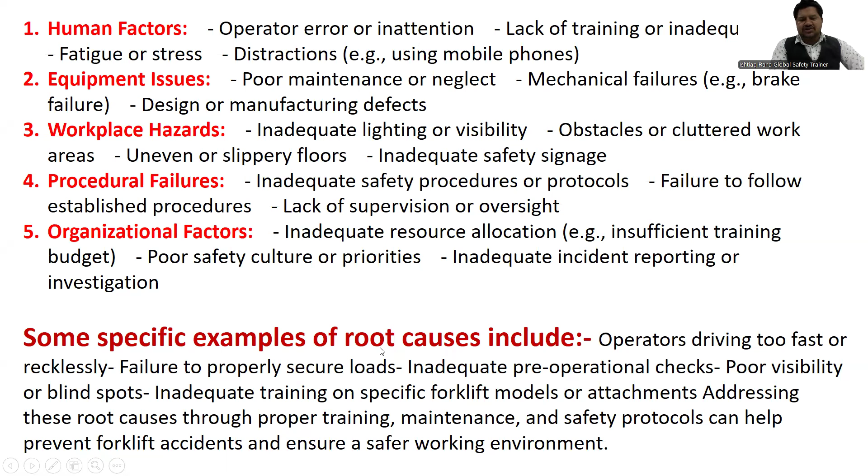You will find plenty, but one is human factors. The second is equipment issues, workplace hazards, procedural failures, or organizational factors like inadequate resource allocation or insufficient training budget. Root causes also include examples like operators driving too fast or recklessly, failure to properly secure loads, and so many other reasons, sometimes no pre-operational checks.

If I ask one more question, what are the common root causes of incidents? I'm sure you will find plenty, but these are the top 20. Shortcut always comes first - 95% of my students and trainees always mention shortcuts.

Out of my 3,000 plus training sessions in more than 12 different countries, this is the claim I'm sharing, because I always ask experienced trainees, as per their understanding, what are the real root causes of accidents. And that's what they mention.

A lot of people mention shortcuts, carelessness, ignorance, no attentiveness, poor knowledge, overconfidence, unsafe acts, unsafe conditions, defective tools and equipment, no use of PPE or no effective trainings, excessive workload, poor communication, not following safety rules and regulations, or poor leadership - like use of push policy only, no value to the safety system, no value to work permits, no joint inspections, poor preparation.

And no self-realization, like 'my safety, my department, my life' - first of all, my responsibility. So safety starts from me, safety starts from you.

Now, another question to all of you: how can we prevent fire incidents 100%, or forklift incidents? Can we? Yes. But in fact, it's a big no, but we can try.

100%. Do you have any understanding about PDCA? Because if you understand PDCA, then I can claim your life is very organized, because you are following PDCA and continually improving. What is PDCA? P stands for plan, D stands for do, C stands for check, A stands for act. So PDCA means plan, do, check, act - and don't do anything without a plan.

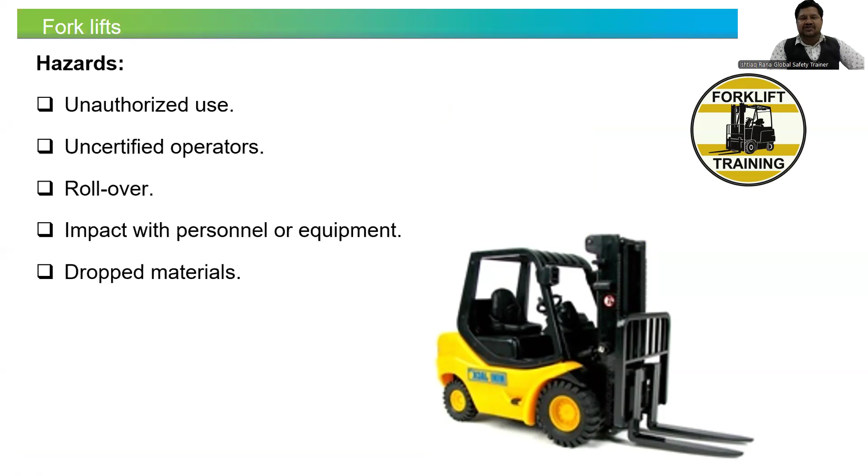Specifically, if we talk about forklift hazards, I can give you an example of Saudi Aramco. They have identified hazards like unauthorized use, uncertified operators, rollover, impact with personnel or equipment, dropped materials - and what control should be there.

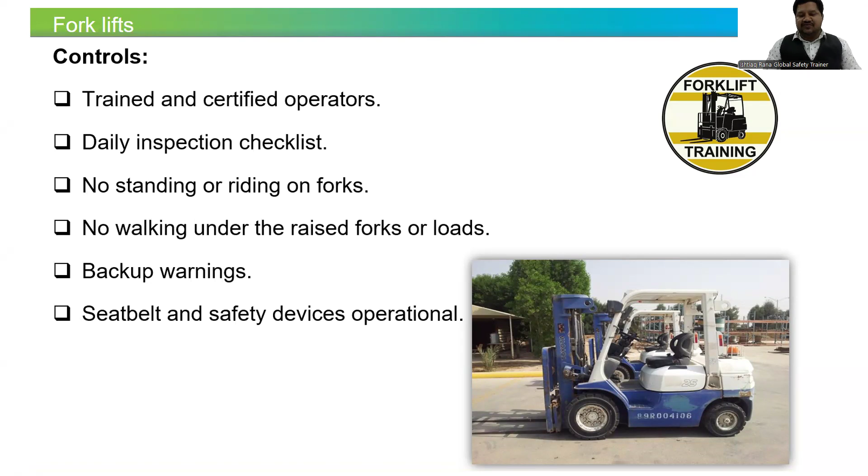Make sure we have trained and certified operators. Daily inspection should be there. No standing or riding on forks, or walking under raised forks or loads. Backup warning should be working. Seat belt should be functioning, and safety devices must also be operational.

Bear in mind, the voice of a forklift safety manager is: it's time to view safety not as a cost, but as an investment in our most valuable assets, which are people.

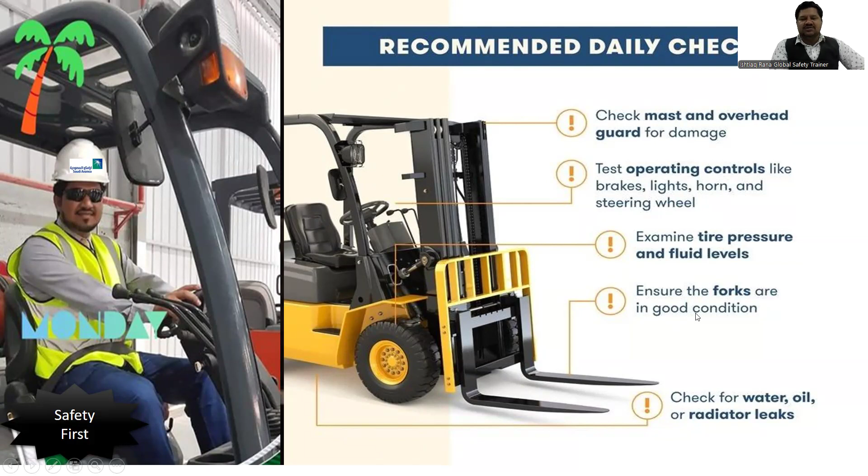So what daily checks are most recommended? Make sure you check the mast and overhead guard for damage. Test operating controls like brakes, lights, horn, and steering wheel. Examine tire pressures and fluid levels. Ensure the forks are in good condition. Check the water, oil, or radiator leaks.

We should put up safety signs and safety posters for general awareness of our people. One example I gave: carry it low and keep it slow. So we can put some safety posters, and simple safety rules like focus safety, highlighting some of the safety rules.

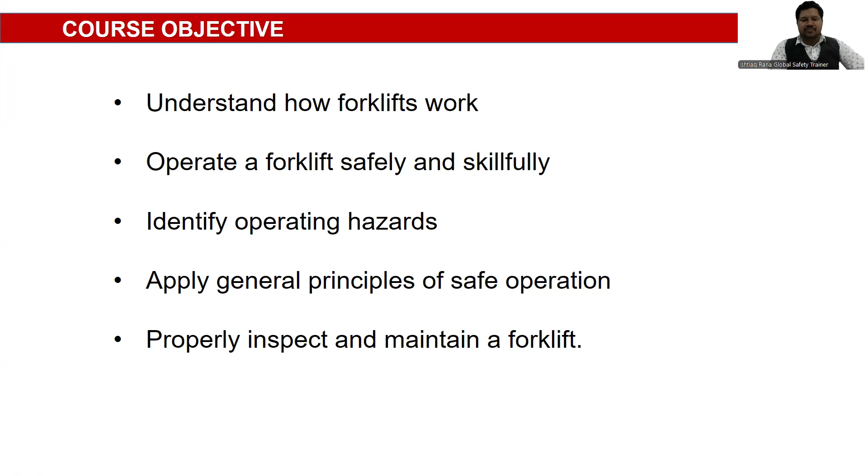Our clear course objective: understand how forklifts work, how the operator must operate the forklift safely and skillfully, the operating hazards, and most importantly the principles of safe operation, and how to properly inspect and maintain a forklift. We will cover 9 different domains: introduction, parts of forklift, forklift accidents, types of forklifts, forklift stability, data plate, and most importantly, forklift safety pre-operational inspection and review.

So let's start with the introduction. Make sure you are 18 years or older to operate a forklift. Below 18 years, the forklift shouldn't be allowed to operate.

Why is forklift training necessary? This is a question for you. Please highlight your answer in the comments, and I'm sure you'll reply if you're watching this video as a passionate learner. Reply with the answer: why is forklift training necessary? Why? I'm waiting for your answer.

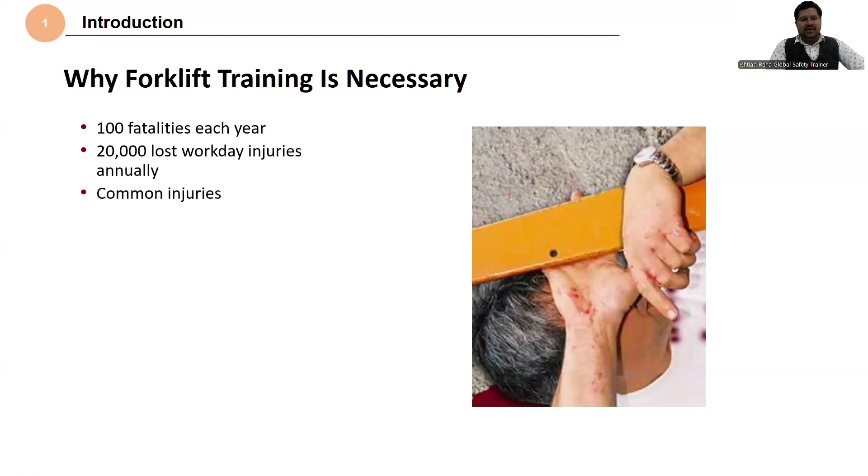Otherwise, I'll tell you: 100 fatalities each year, 20,000 lost work day injuries annually. Common injuries include hitting a pedestrian, tipping over due to improperly positioned loads, falling from raised forks, even falling from a ladder while struck by a forklift, and falling material. As per OSHA 1910.178, only trained and authorized operators shall be permitted to operate powered industrial trucks.

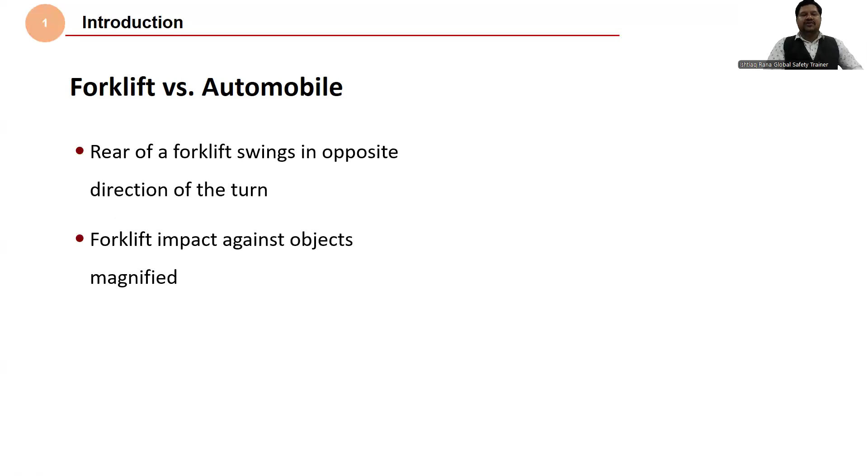So forklift versus automobile, look at the difference. The rear of a forklift swings in the opposite direction of the turn, and a forklift's impact against an object is magnified. Bear in mind, the rear of a forklift swings in the opposite direction of the turn, and the forklift's impact against an object is magnified as it drives backward and forward.

The rear of a forklift swings in the opposite direction of the turn, and the forklift's impact against an object is magnified as it drives backward or forward. One hand on controls, one hand on controls. So look at the difference between how a car and a forklift operate.

So if I ask you, what is easier to operate, a forklift or a car? I'm waiting for your answer.

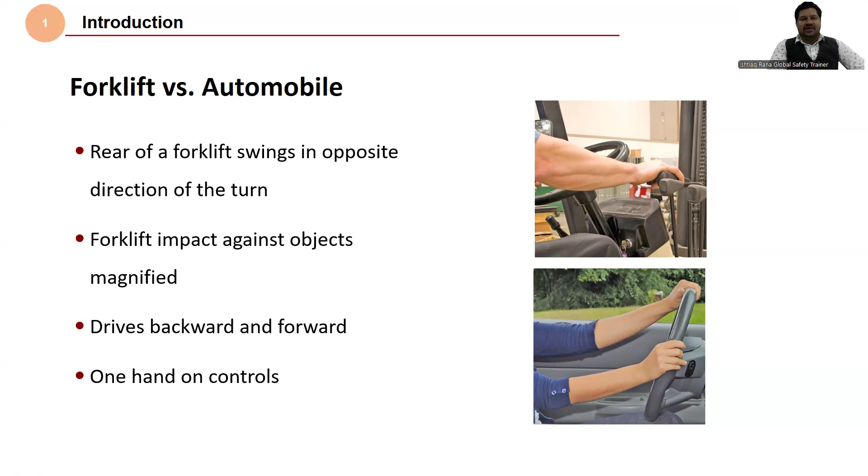Yes, there must be PPE, especially gloves, glasses, hearing protection devices, helmet, and insulated jacket in case of cold stores. And now, parts of the forklift.

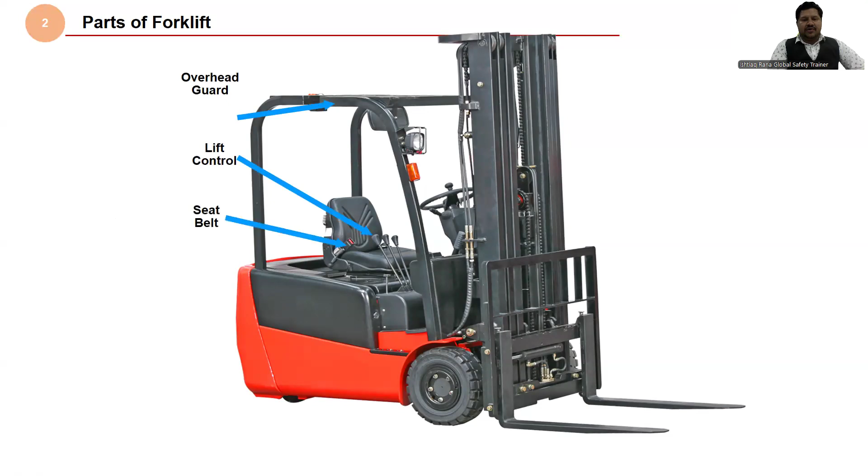Look at the forklift, these are the parts: overhead guard, lift control, seat belt, tilt control, mast, and lift cylinder, which is very important.

Lift chains should be kept in good condition and maintained at all times. A preventive maintenance plan for the forklift is very important to manage all these parts: backrest, carriage, and forks. Forks should not be wobbling; everything should be in good condition.

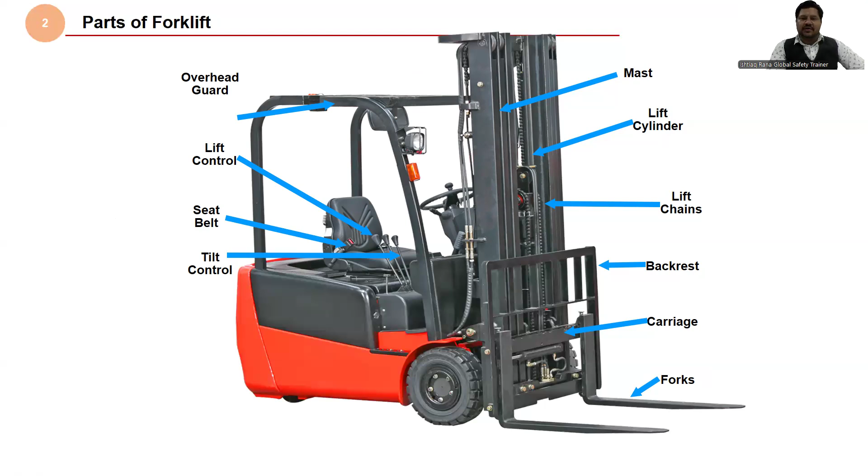Otherwise, report to the maintenance department, raise a work order, and let them correct it. Don't operate a damaged or defaulted forklift, because after all, your life is important and you are the only hero for your family. So don't put yourself at risk - be safe. Safety is your necessity, because a company will simply get new employees.

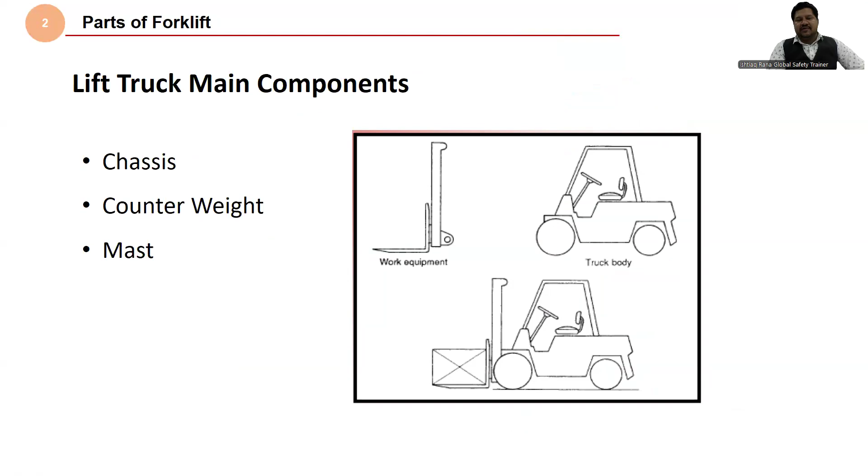Lift truck main components include chassis, counterweight, mast, work equipment, and truck body. The counterbalance balances everything to achieve center of gravity.

Of course, counterbalance forklifts are 99.9% front wheel drive and rear wheel steering. Why? Because in a loaded condition, all of the weight shifts over to the drive axle for maximum traction and braking power. In a turning situation, the rear end of the truck swings while the front end stays stationary.

Look at the engine-powered forklift: mast, overhead guard, hydraulic pump, engine, rear wheel, clutch or torque converter, transmission, fork, mast, and even front wheel and front axle.

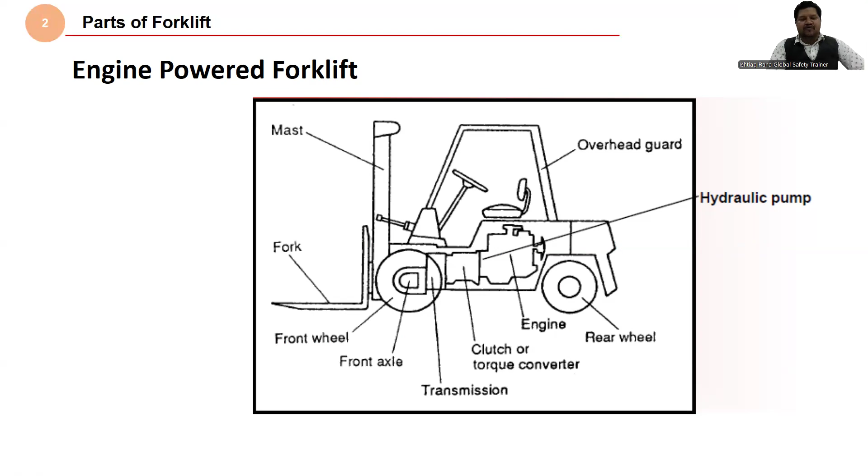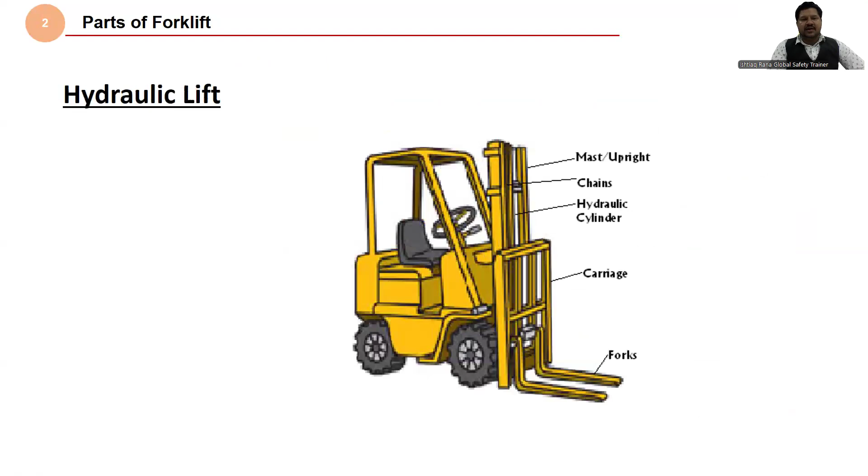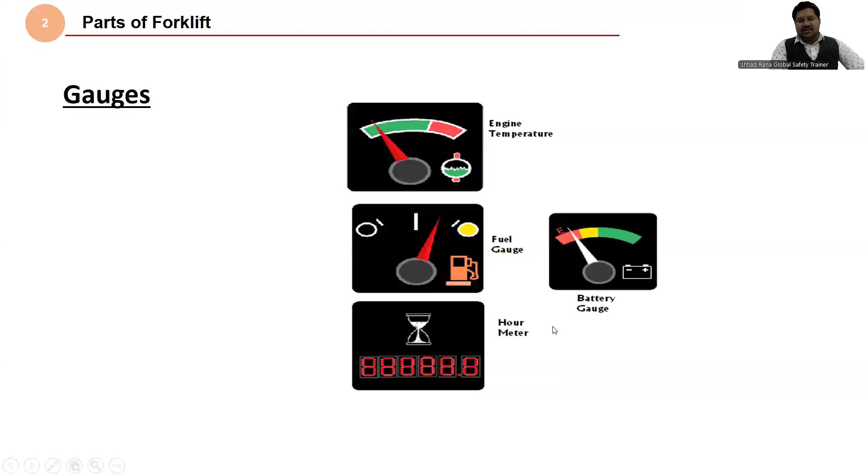Hydraulic lift, mast, upright chains, hydraulic cylinder, carriage and forks. And gauges are important, like engine temperature, fuel gauge, battery gauge, and hour meter.

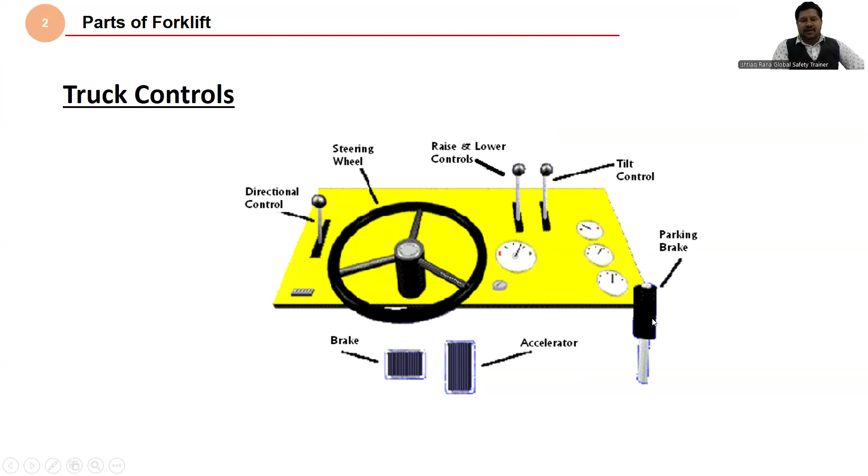Truck controls - make sure we understand directional control. This one shows we have raise and lower controls, tilt control, parking brake, accelerator, and brake. Switches include horn and ignition.

Mast specifications: overall lowered height, or maximum fork height, or free lift, OALH or MFH - usually the same, but they vary based upon the mast overlap.

Keep learning, guys, keep learning, because being a defensive forklift operator requires a lot of training. The training zone is helping with that encouragement to keep learning every day. It's not like you'll watch this video one time and understand everything. You might have to watch it again and again just to make sure you understand every technical point, every word, and don't move on to the next page until you understand the current one.

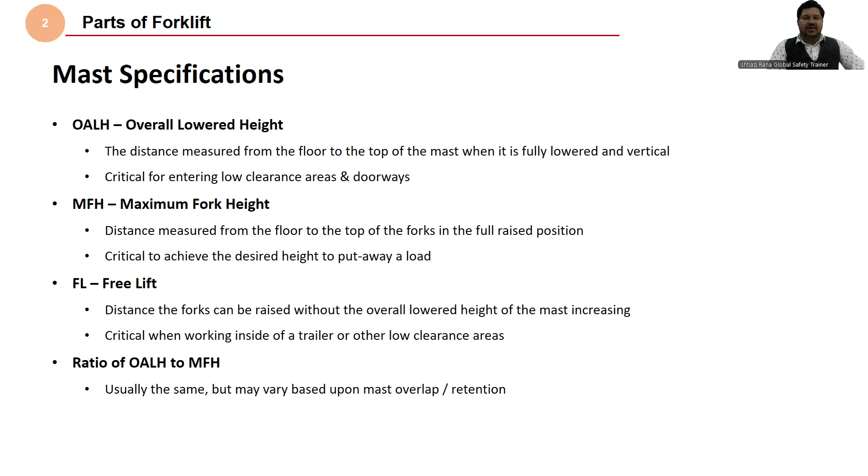And mast specification - look at this, we have free lift, overall height lowered, and maximum fork height. This is the difference, because one picture is louder than words. I'm sure through the pictures you will have some understanding of how the OAHL, overall height lowered, or free lift, compares with maximum fork height, how it looks.

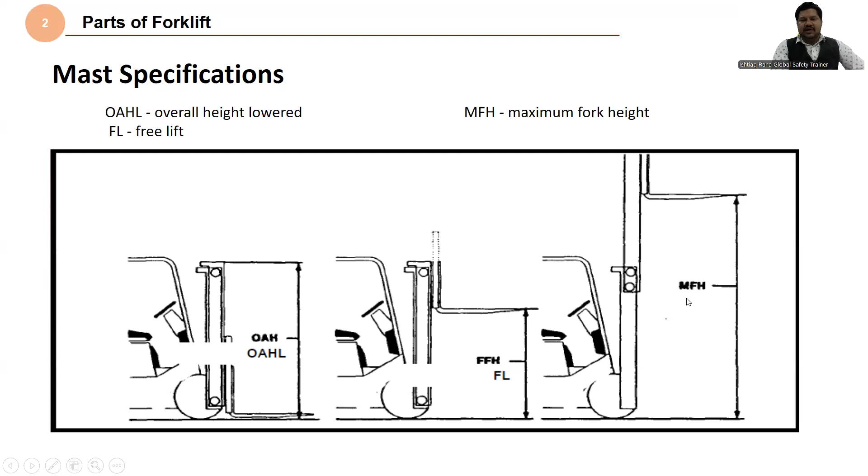Mast types: we have a duplex, like a two-stage free view mast. The mast has two sections - one outer that does not move, and an inner section that raises and elevates the carriage and forks. We also have a three-stage mast, consisting of three sections - one outer and two inners - and the two inner sections raise as the mast elevates higher. This mast type provides a shorter lowered height for use through doorways.

We also have a four-stage mast, which we call quad, consisting of four sections - one outer and three inner rails. We also have standard hook type forks with dimensions class 2 - 16 inches, 20 inches, and 25 inches. Three different sizes and types are there.

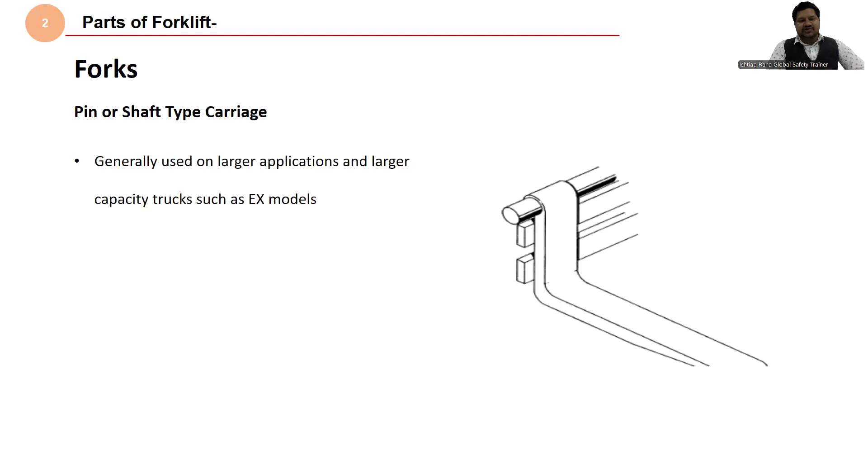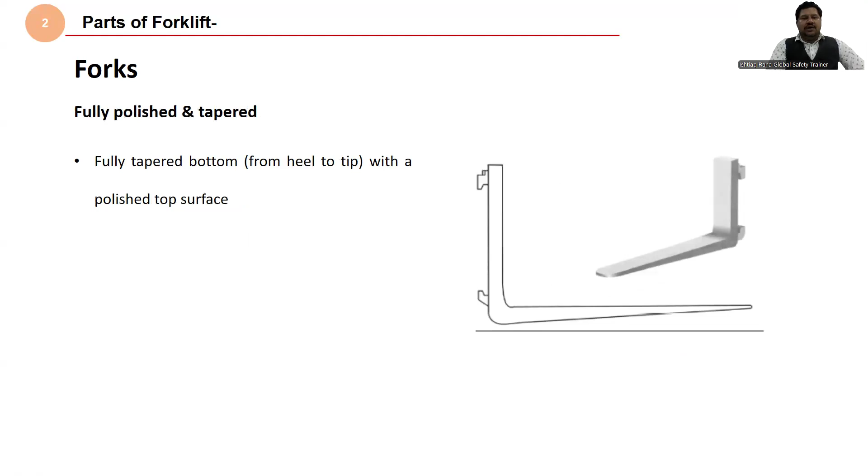We also have pin or shaft type carriages, generally used on larger application, larger capacity trucks such as EX models. We also have standard taper pallet forks - make sure we lift the load at a maximum of 75% with a fully tapered bottom. These are the types of forks. We also have block forks and lumber forks in different sizes.

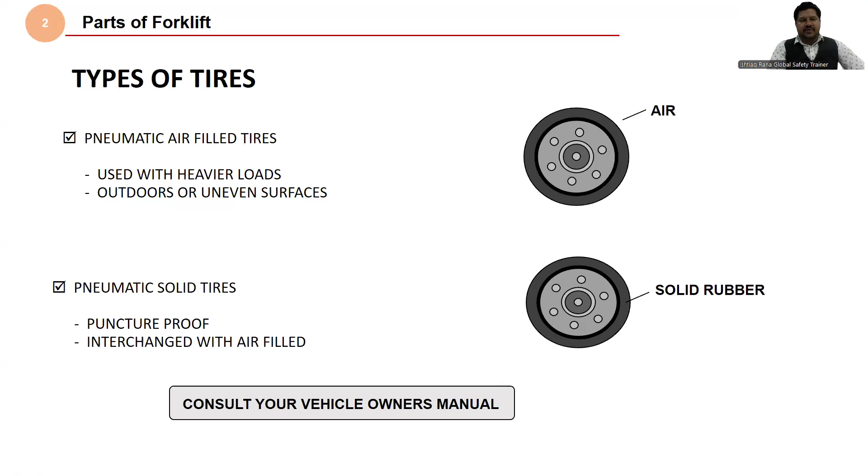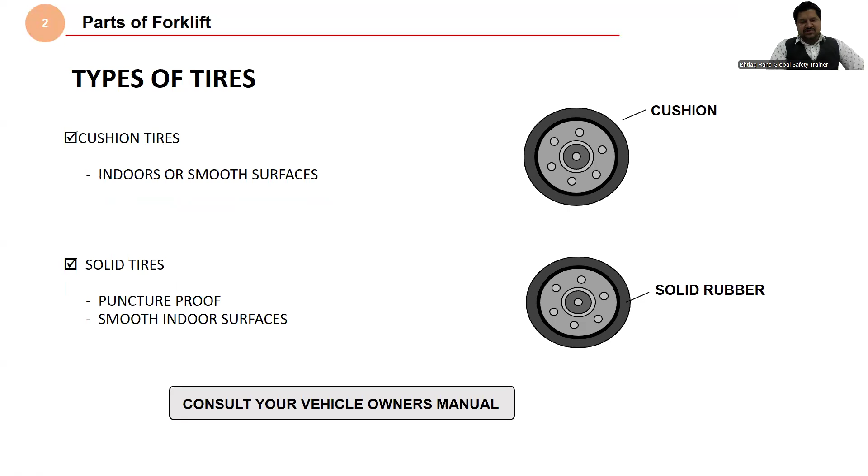Types of tires - we have air and solid rubber. We have cushion or solid rubber tires for indoor or smooth surfaces. We use cushion tires or solid tires, which are puncture-proof, for smooth indoor surfaces. Consult your vehicle owner's manual.

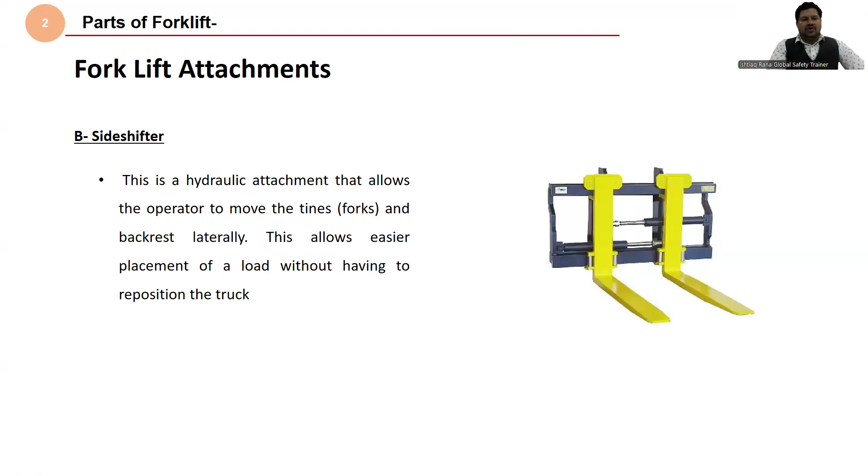Forklift attachments - we have multiple attachments like dimensioning devices we can attach. For fork truck mounted dimension systems that provide dimensions for the cargo, or side shifters. Hydraulic attachments are there, and rotators we can also use, and fork positioning. It's not like you always use it this way - you can adjust.

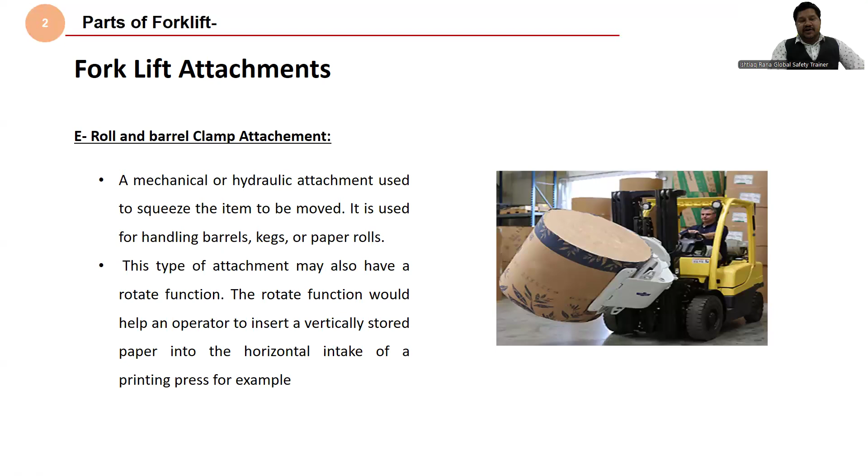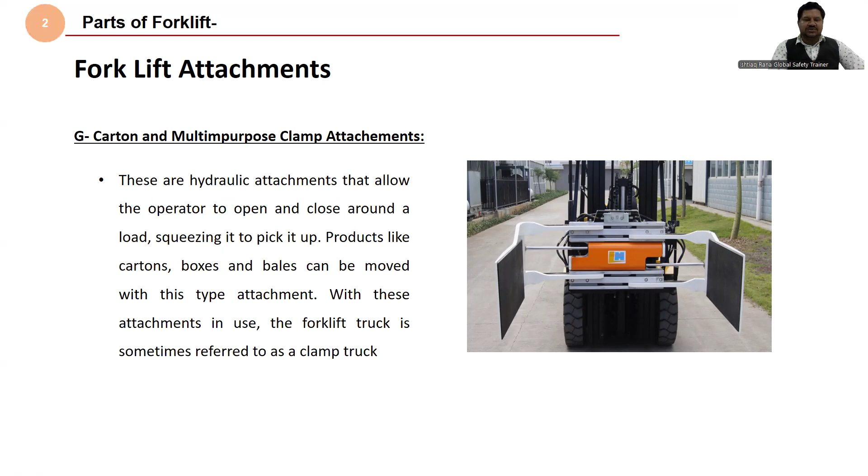And also we have a roll and barrel clamp attachment. Different attachments are there, but be careful that those attachments must be designed properly, and the operator must be good enough to use all these attachments safely. Pole attachment is also there. We also have carton and multi-purpose clamp attachments - the picture is more loaded than words. We have drum handler attachments, especially to lift drums.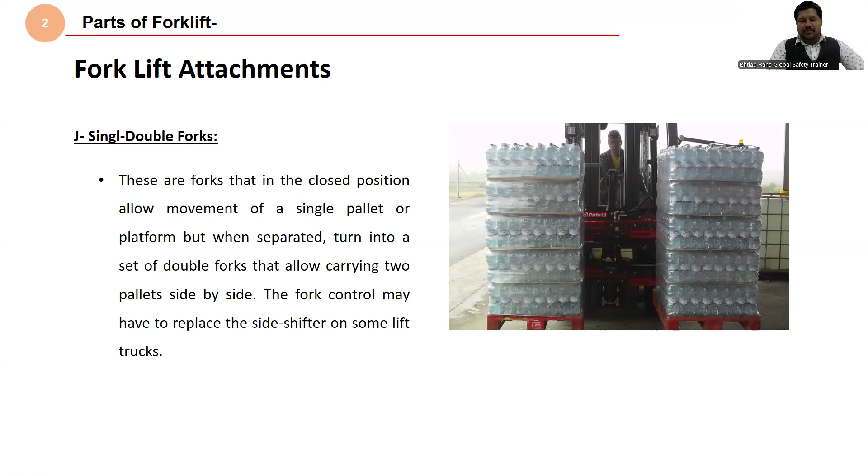We also have man baskets, especially to work at height, but full body harness and anchor point all need to be used. Single and double forks are there. So as per your industry need, or your need in the warehouse or production floors, you have to do a need assessment. As per your needs, you decide what things are important. Telescopic forks are there too.

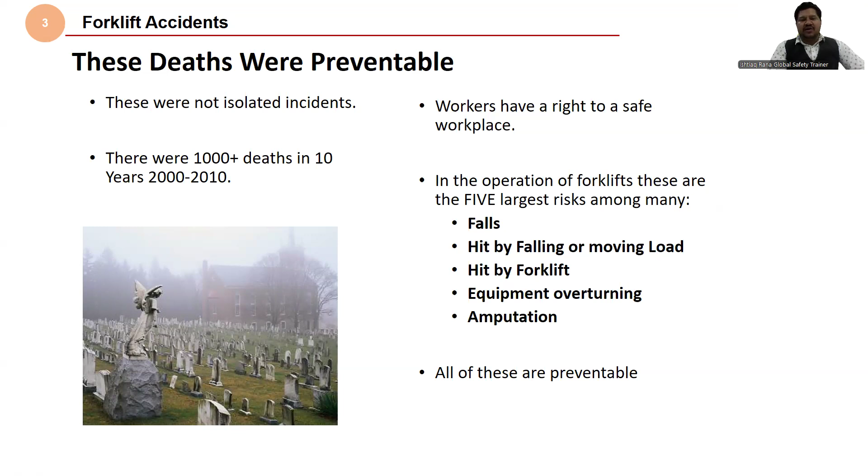Start learning, because we have two domains of learning: either learn from our own mistakes or learn from the mistakes of others. These deaths were preventable, to be very honest, because if forklift operation involves defensive techniques and managing at least five top risks - like falls, being hit by falling or moving loads, hit by forklift equipment, overturning, or amputations - all are preventable.

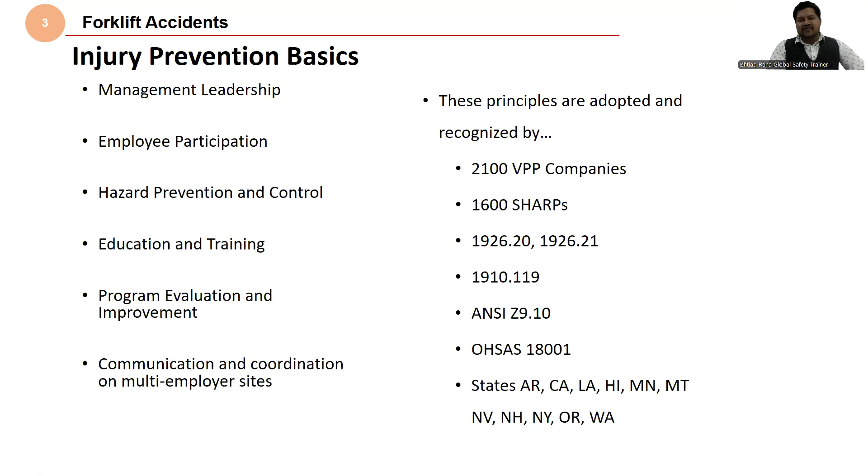Injury prevention requires basic management leadership and employee participation. We need hazard control, a prevention and control system, education and training, because training and development are both reciprocal.

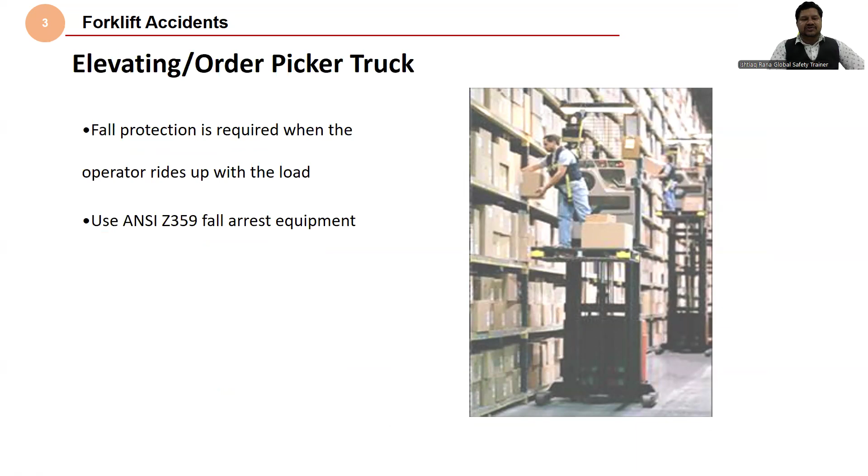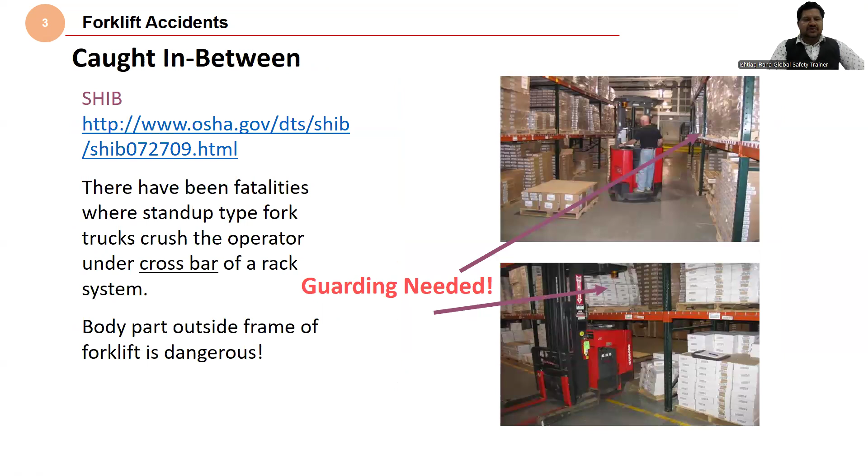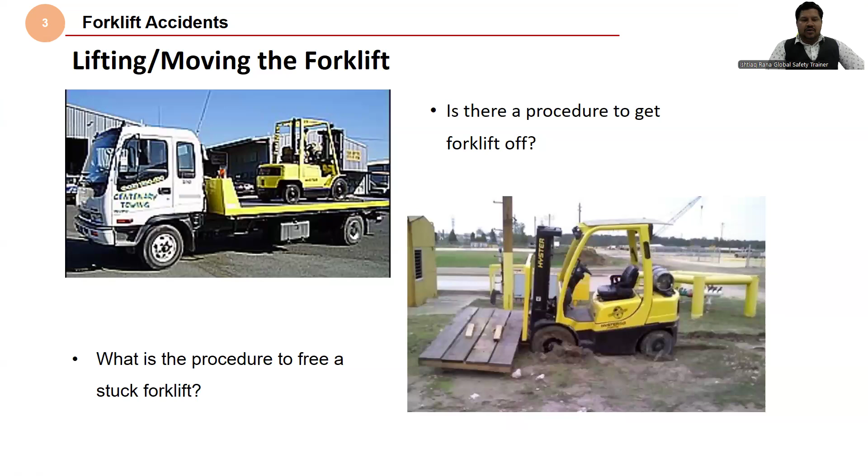What can be done about these accidents? Just examples: guards needed, lifting and moving the forklift. Is there a procedure to get the forklift off? How are you going to load or offload? What is the procedure to free a stuck forklift? How should truck unloading happen?

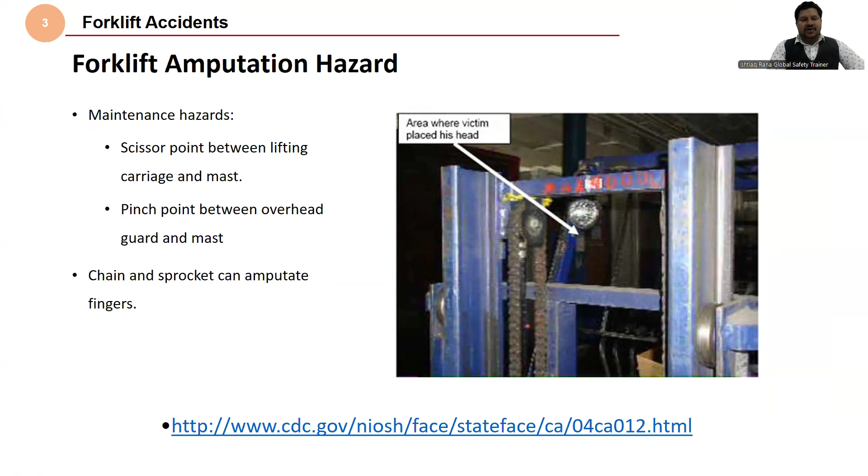Forklift amputation hazard is there. All the pinch points of dangerous amputation hazards need to be identified, like the scissor point between the lifting carriage and mast, pinch points between the overhead guard and mast, and the chain and sprocket can amputate fingers. Electrical hazards should also be kept in mind. Fire and burns are both hazards.

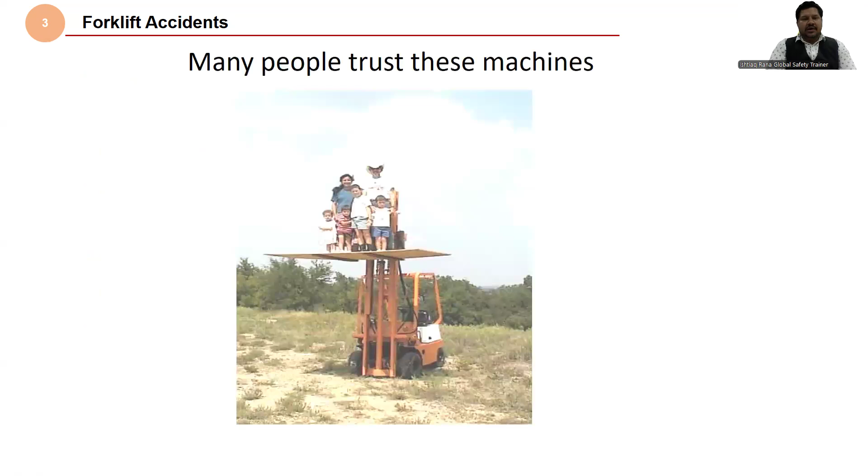Many people trust these machines. Look at the types of forklifts. We have electric trucks in different classes: electric truck, class 2 electric truck, or hand truck.

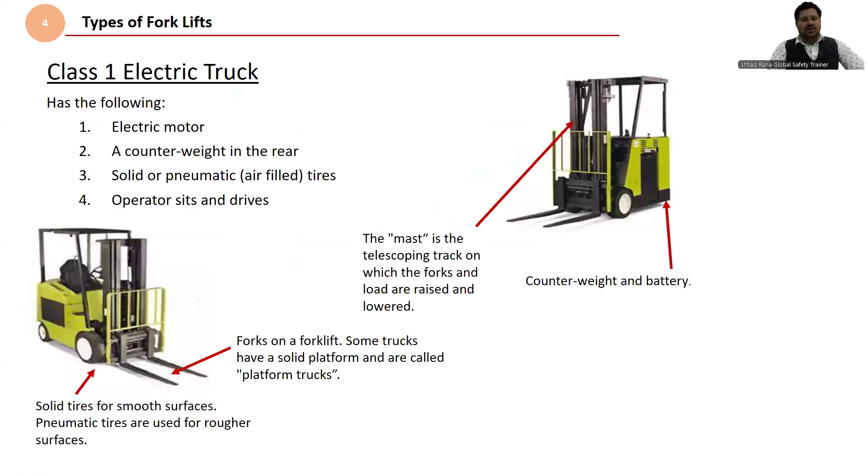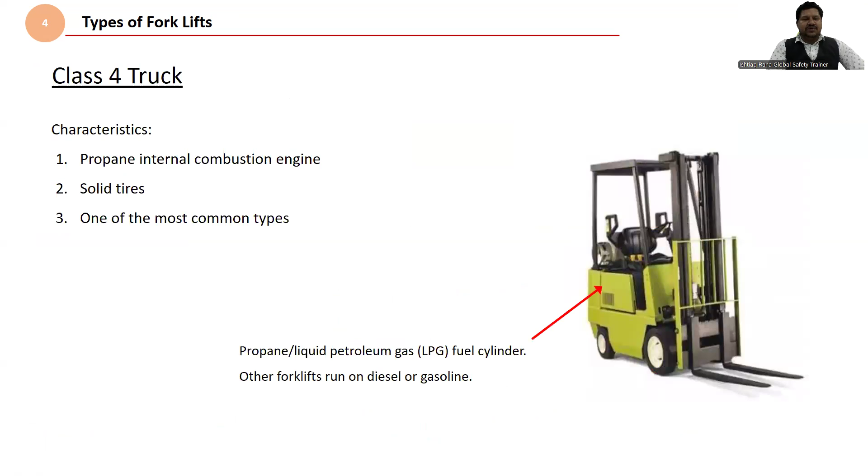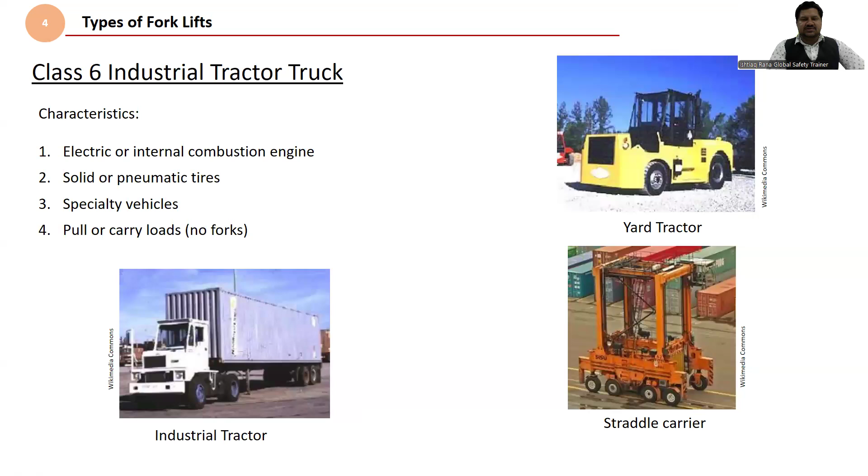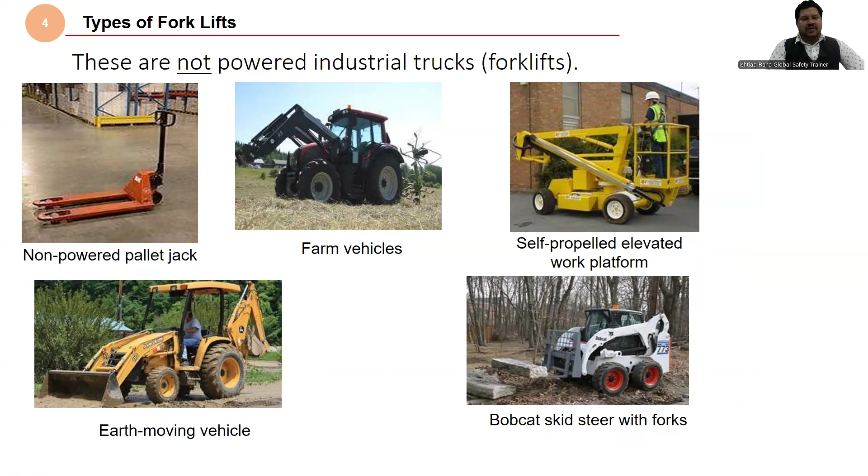How can forklifts be stable? Stability of the forklift depends on load and counterweight; center of gravity needs to be achieved, and most importantly, balance is life. Balance is everything, the teeter-totter principle.

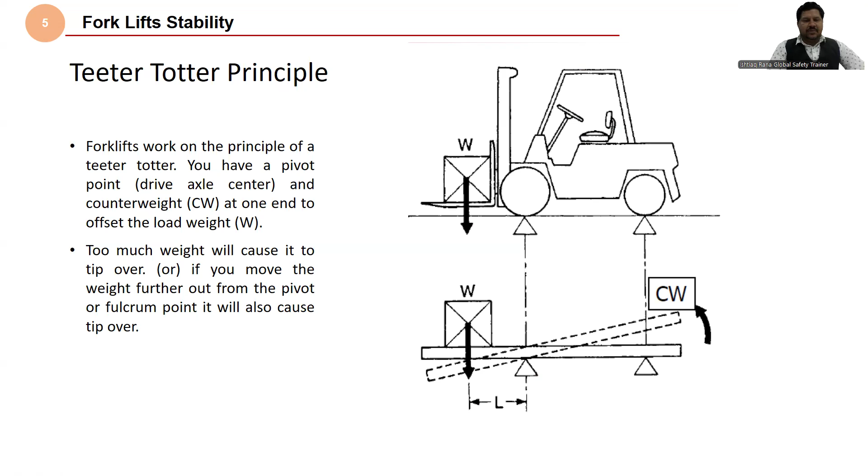The picture shows it more loaded. Look at the diagram, how the counterweight and the weight need to be balanced out. Look at the counterweight on the right side and the front. The load and fulcrum have to be balanced, and the surface should be leveled.

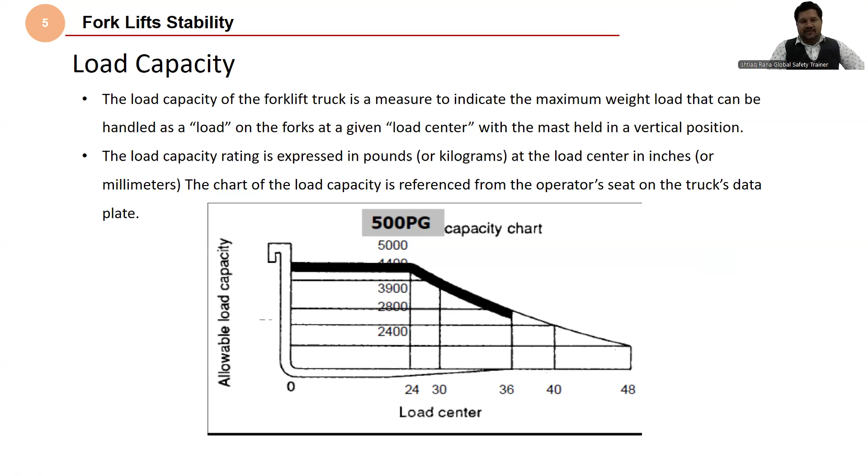Load capacity is important to understand. If my question is, if your forklift has a capacity of 1 ton, how much weight in kg are you going to lift with that 1 ton capacity forklift? Waiting for your answer. Load center is important, guys.

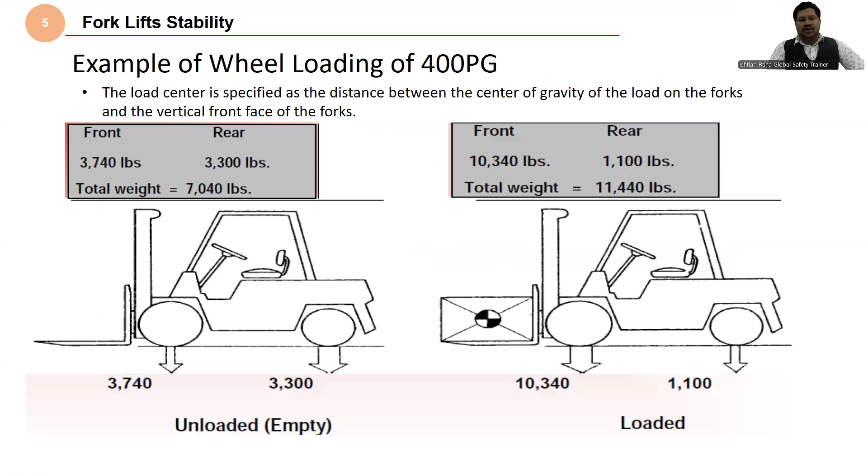Weight distribution is important. Examples of wheel loading or fork loading are there. Load center: be cautious of long load centers. Long load and rated load have a strong difference.

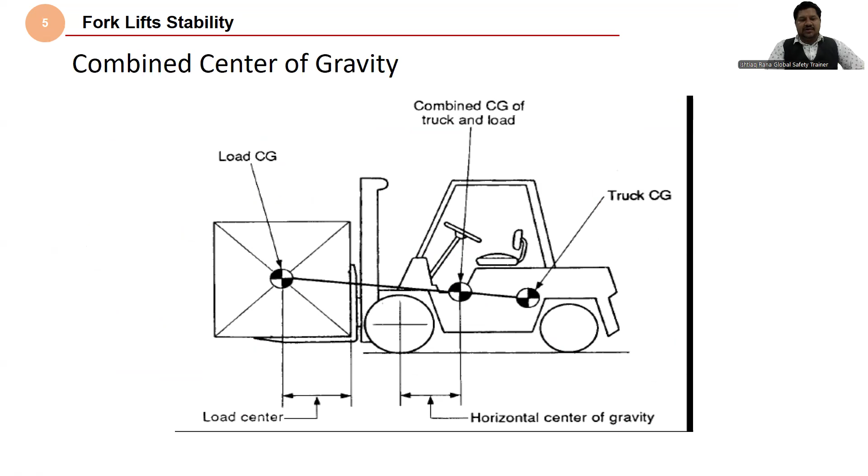Center of gravity: truck horizontal center of gravity, and combined center of gravity, how it looks like. It's all about gravity and balance.

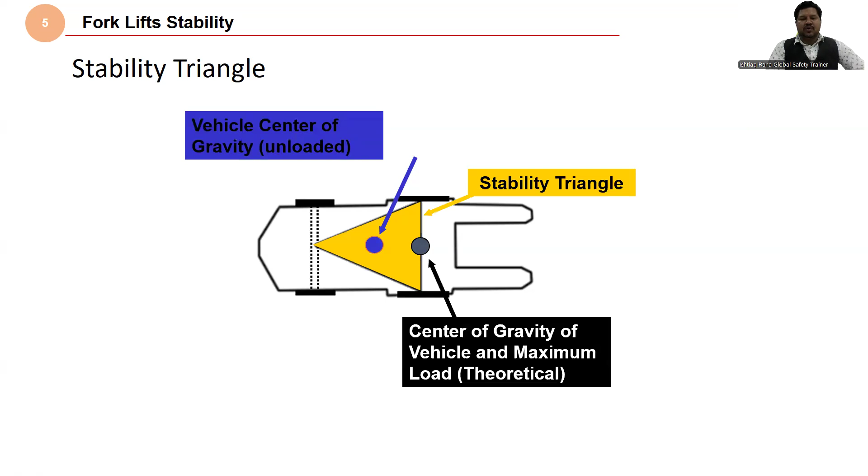The stability triangle, how it looks like. Vehicle center of gravity unloaded. Stability triangle is there: center of gravity of vehicle and maximum load theoretically. So what can cause a tip over? Center of gravity side to side, center of gravity forward, center of gravity back. The combination of actions or circumstances can cause a tip over, so be careful.

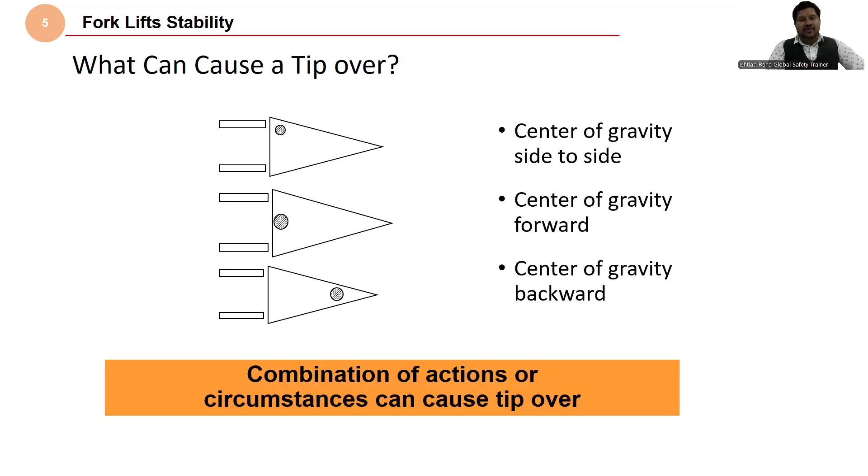Stability triangle, and how the data plate looks like. Truck model, attachment, tire size, lift height, load center capacity, vertical, different serial numbers - complete information is on the data plate, including maximum and minimum weighing capacity.

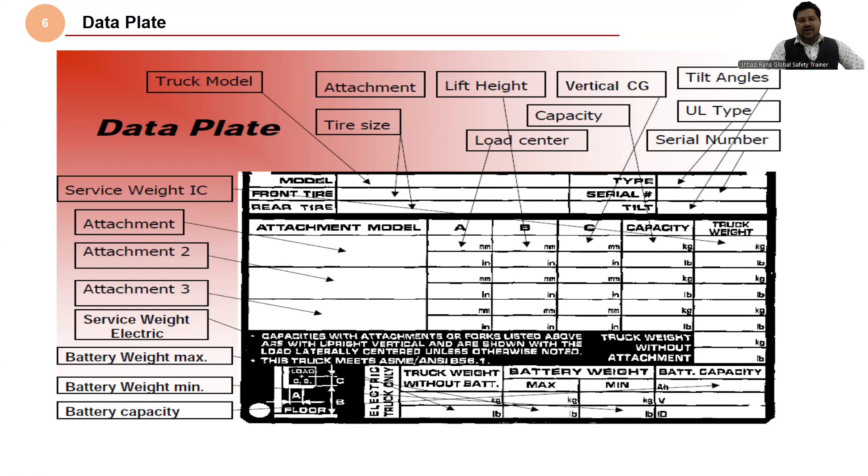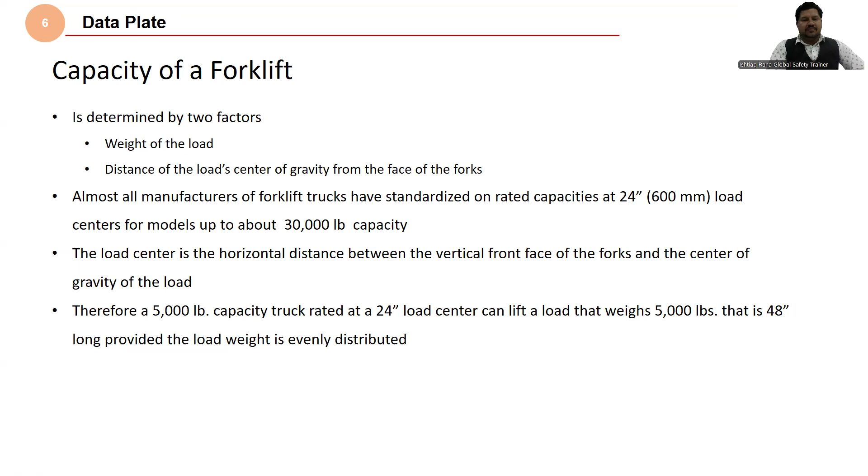The importance of data plates should never be ignored, and we all have to maintain a proper, neat and clean data plate. All information as per OSHA regulations must critically meet that criteria. Some formulas are given in inch-pound ratings.

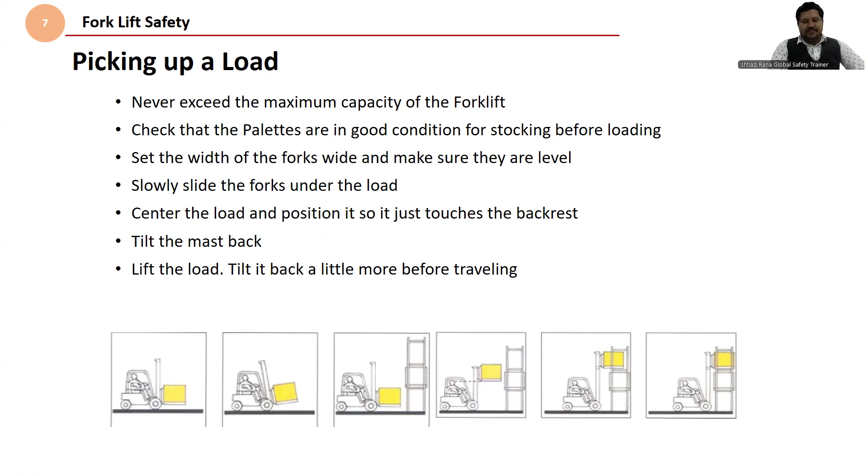Plan and prepare for loading. Planning is important here. Picking up a load, how it should be done - very important rules are mentioned, especially tilting the mast back. Moving the load, how we have to move it, and driving on an incline.

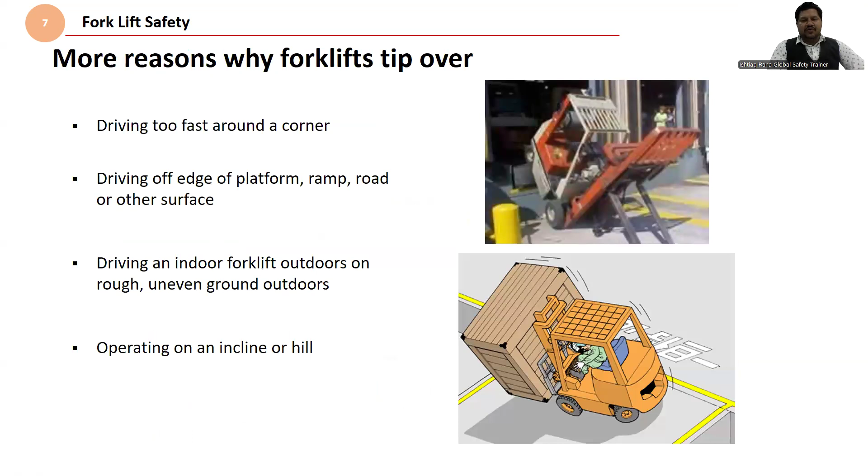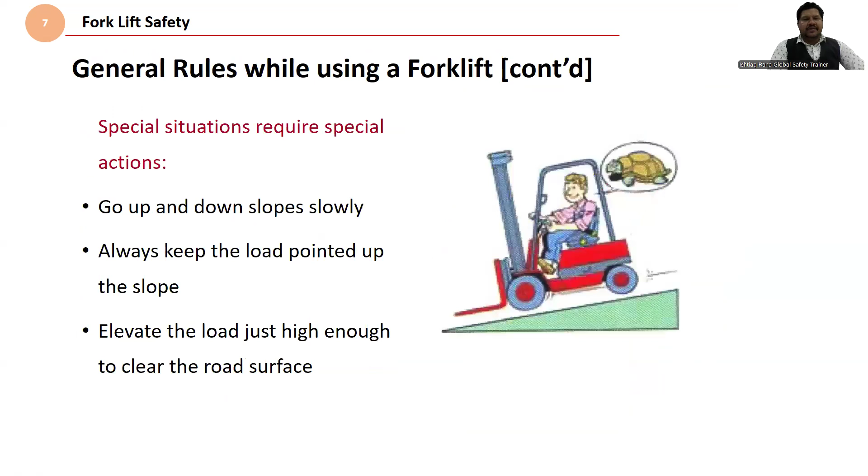Guidelines for starting the job, guidelines for finishing the job, and general rules should be there. You can take a screenshot of these rules and put them on the notice board for the continual learning of your team.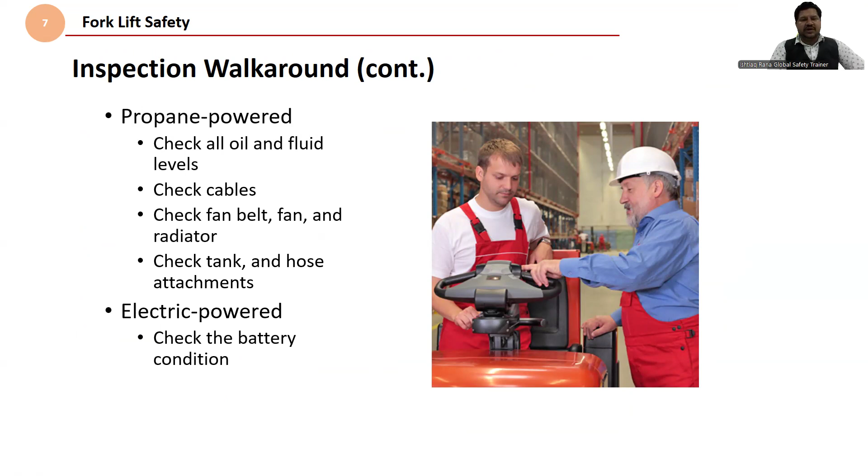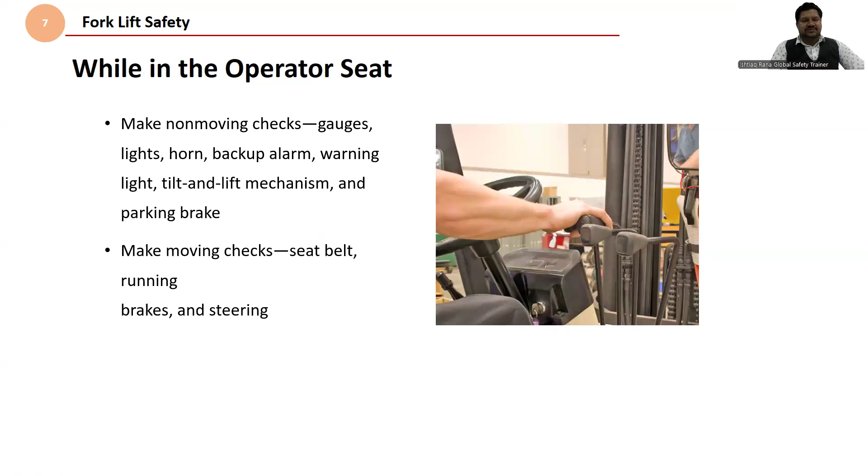Inspection is important. For propane powered forklifts, check oil, liquid, cables, fan belts, tank and hose attachment. For electric powered, check the battery condition, and while the operator's seat, make non-moving checks like gauges, lights, and other things. I'll share a checklist here.

Operating a forklift only by authorized and trained personnel. Tip over safety procedure: always wear your safety belt.

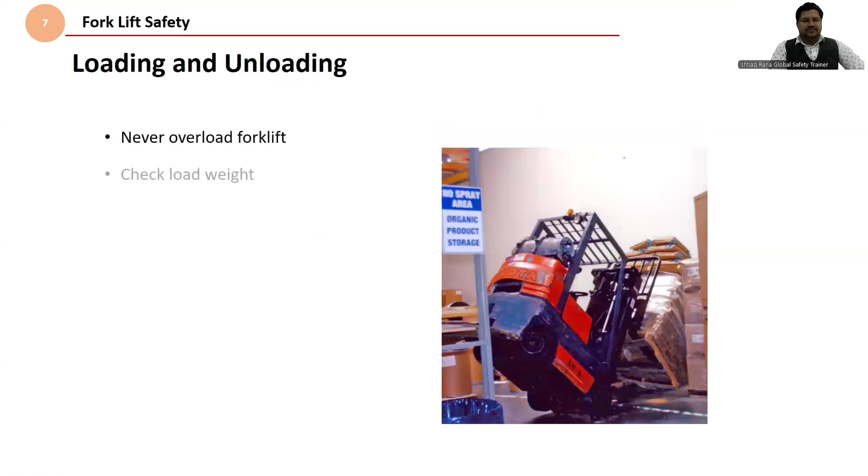Load and unload, traveling. And for traveling, make sure the floor shouldn't be damaged.

Never eat, drink, and don't use mobile. Ramps and railroads, docks - different situations are there.

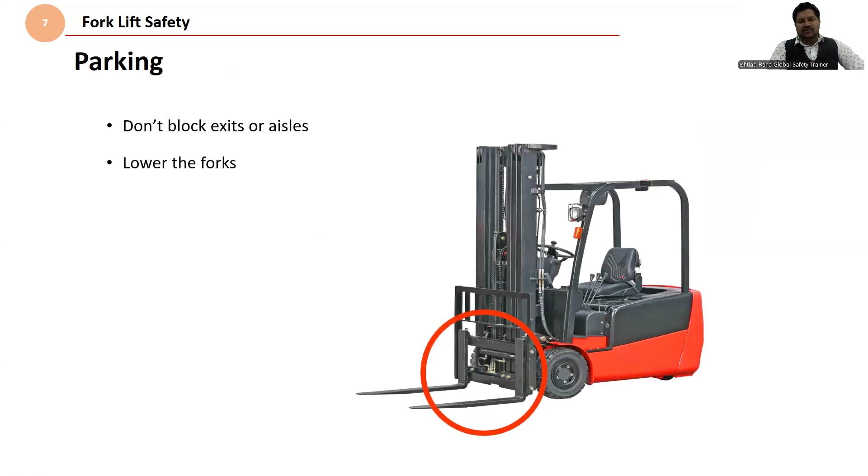For parking, don't block exits or aisles, lower the forks, set gear to neutral, set the parking brake, and turn off the key.

For refueling, fill in a well ventilated area. It's highly flammable gas, so do not smoke. Danger is there.

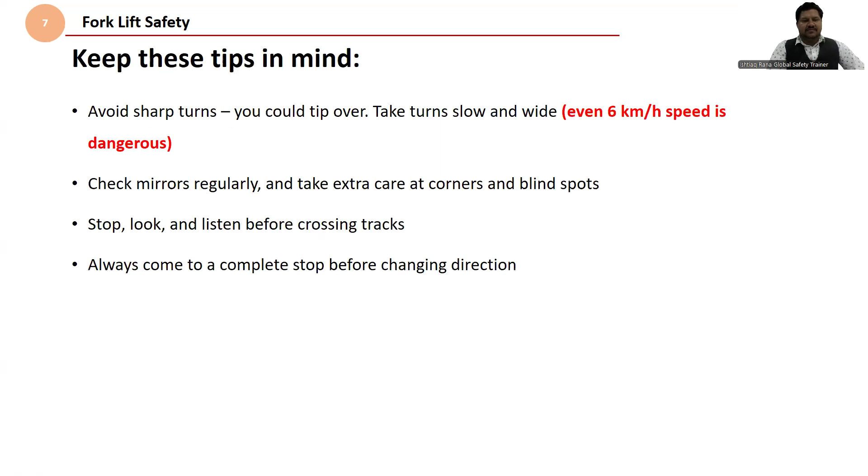Battery charging is important, but should be in a designated area. Wear proper PPE - safety belt is important to avoid tip over. Also, we can take a forklift video clip from YouTube.

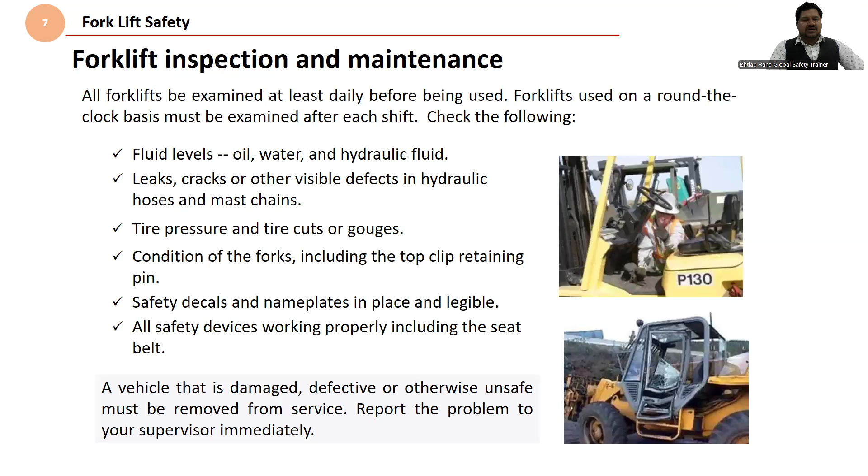Forklift inspection and maintenance: fluid levels, tire pressures, condition of forks, safety decals - everything needs to be checked.

Attachments and stacking loads of pallets - pallet quality should also be good enough.

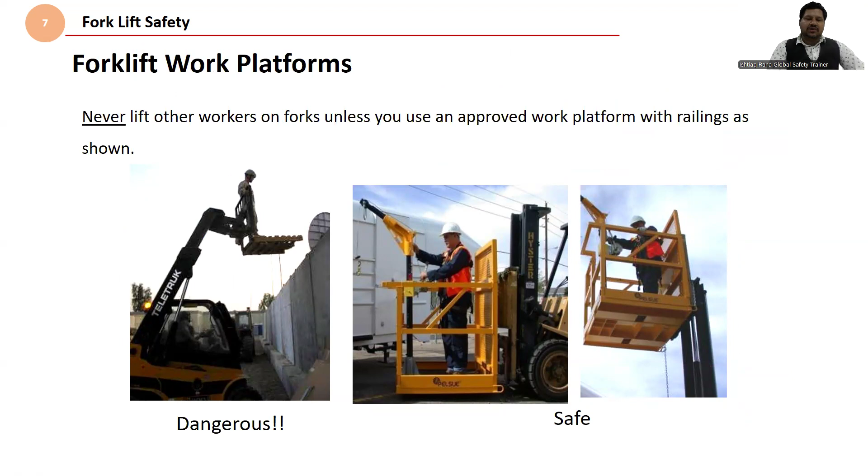Safe and dangerous - you can observe a picture is louder than 1,000 words. Avoid these extremely dangerous practices.

Make sure you understand the blind spots of the forklift, because within those blind spots, things wouldn't be in your control. It's much better to understand and have a 360-degree view, especially for pedestrians.

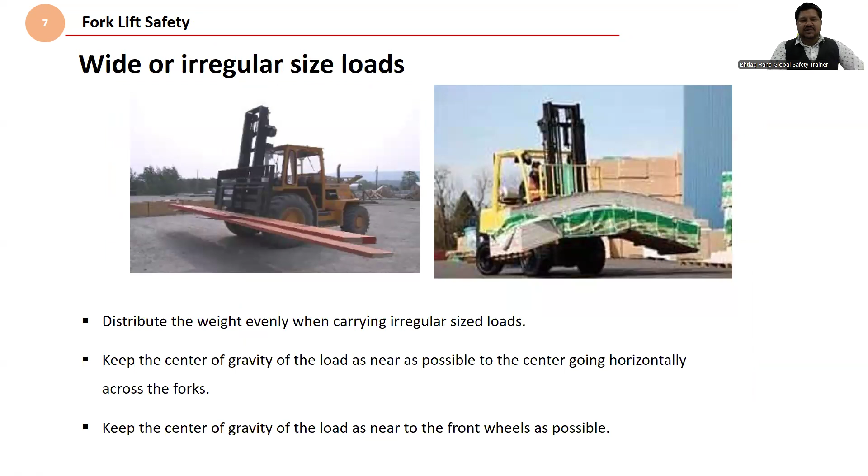And how it can happen - see, loading trailers and railroad cars, wide or irregular size loads, different situations. So be aware of the hazards you face and take precautions.

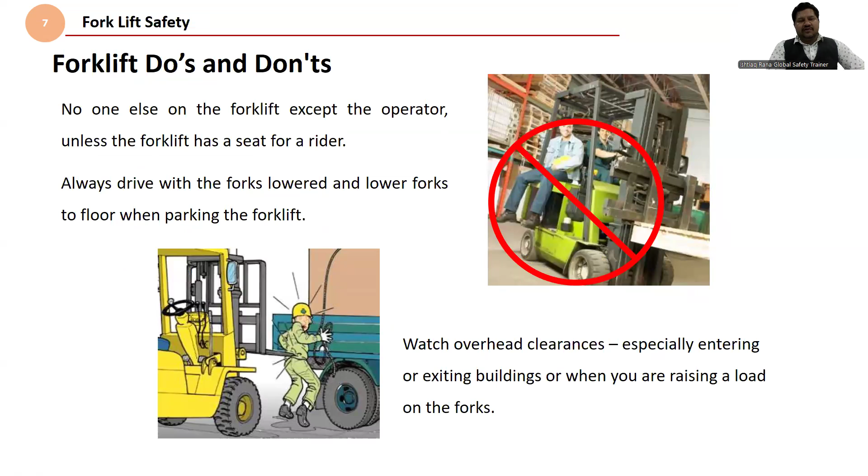Be familiar with the forklift do's and don'ts. You have to understand: stay out of the mast of the forklift, no speeding, don't leave your forklift unattended.

Safe operation of forklift and other powered industrial trucks - you must also have hands-on training. Practical training is important, and this is the pre-operation checklist.

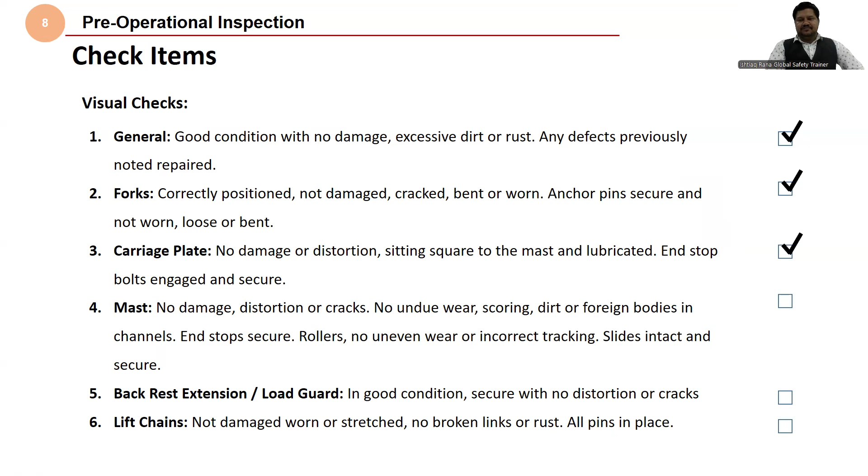But don't just tick boxes. Make sure you understand each point, and if something is not good, mark it with a cross and let the maintenance department take care of your forklift. Because if you tick everything as fine, the maintenance department will be sleeping. So check everything.

All points are important here.

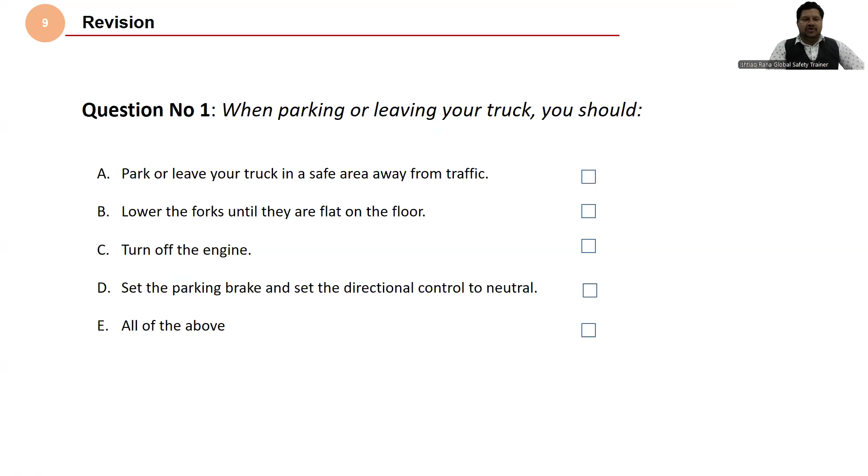Quiz time. When parking or leaving your truck, you should do all of the above. All industrial trucks, lift trucks, are equipped with controls which allow you to raise, lower, and tilt the forks - true.

Rear wheel steering is used on forklifts because it gives the operator greater control when using the forks - true. Always check the air pressure - yes.

All industrial trucks are equipped with a clutch - no. Which of the following is not a type of forklift? Air-cooled powered.

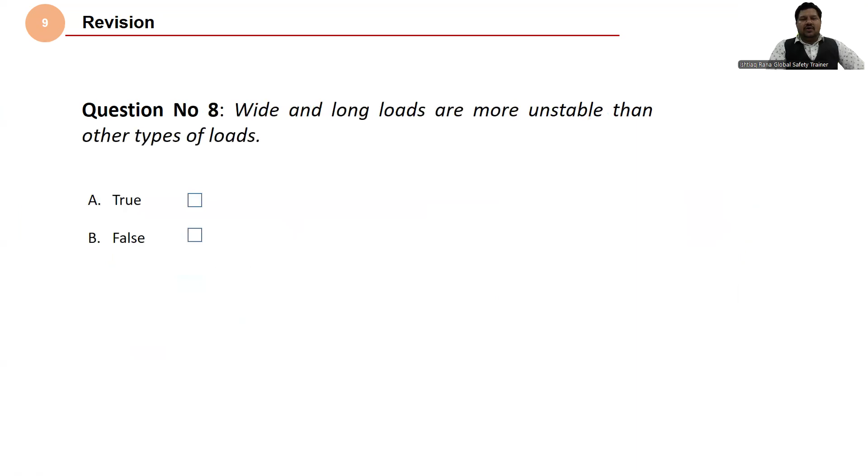Wide and long loads are more unstable than other types of load - true. If the lift mechanism on your lift fails, you should...

Try to repair the chain or hydraulic system - false. The load capacity of a truck can be found on its data plate.

True, the load capacity of the truck can be found on its data plate - true. Thank you very much, gentlemen.

I hope this training video has given you comprehensive information and knowledge about forklift safe operation. So again, after this training, you still have to ask: am I a safe, defensive forklift operator?

Because machines are killers, heavy equipment is even more of a killer, so we have to learn, keep learning. That's why training zone is there. So like me, I'm sure you're also learning.